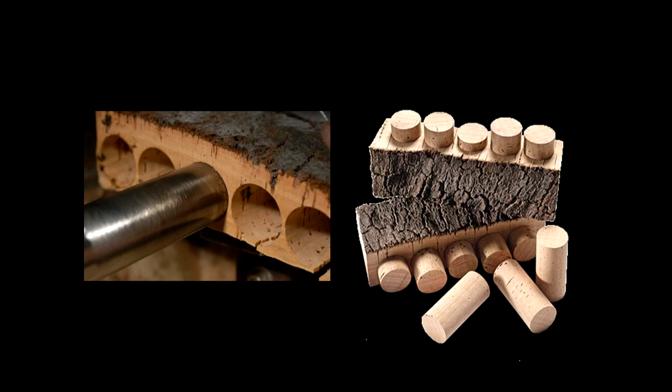And then the waste from the wine stopper industry and from the cork forestry in general is granulated. And then it's steam cooked using energy almost entirely from waste biomass from the forestry. And when it's cooked, the cork expands and it releases a natural resin inside the cork, which is called suberin. And it melts and then rebonds to form solid blocks of pure cork with no added ingredients whatsoever in the cork blocks.

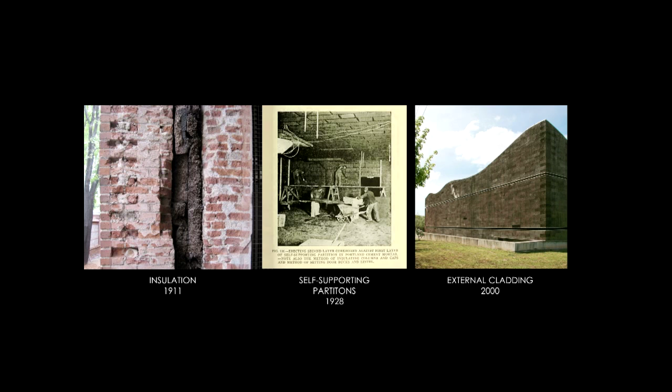And expanded cork has been used in the construction industry extensively for over 100 years, and recently as external cladding, first used about 20 years ago by Alvaro Siza and Souto de Moura.

Oops. So here we're going to describe the design approach. Stop it.

So contemporary buildings generally have to meet a range of performance requirements, and they do so typically by starting with structure, which is insulated, vapor control and breather membranes often introduced, external framing and cladding, and internal lining and finishes, which creates a very complex wall assembly.

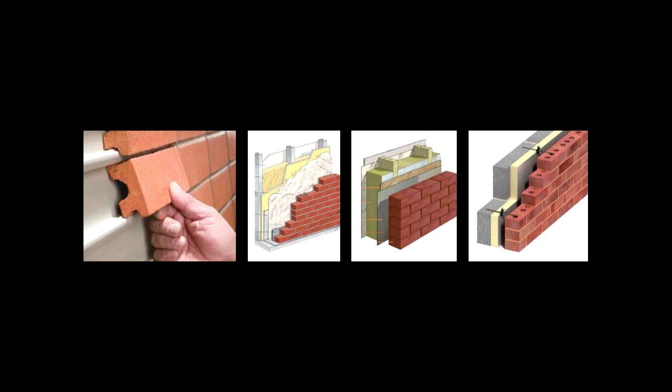For example, so-called brick houses these days are often, in fact, concrete or timber frame structure that only use brick really for the outer skin, which is combined with a whole range of other building components, materials, and products. And this, when they're all sort of bonded and glued and screwed together, creates complexity at every stage of the building's life cycle, and often ends with this, destructive demolition.

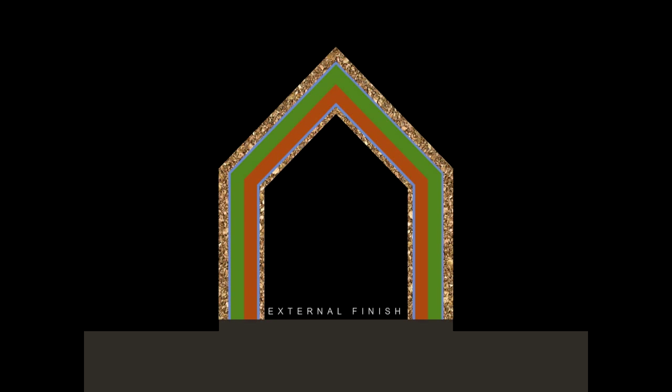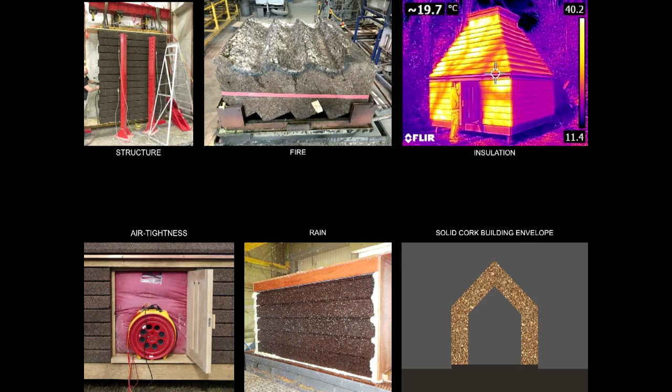And it's with this objective in mind that we undertook a 3-year funded research project with a team of industry and academic partners. And together, we researched and developed the solid cork building envelope using in-depth prototyping and a range of lab tests to, if you like, de-risk this new construction system for use in its first live project, the Cork House.

Okay, on to fabrication. So taking expanded cork billets, we developed a simple prefabricated construction kit that's assembled by hand on site. It's a little bit like a kind of giant plant-based Lego. The 1/2 metre thick cork blocks interlock using a tongue and groove fit with no glue or mortar.

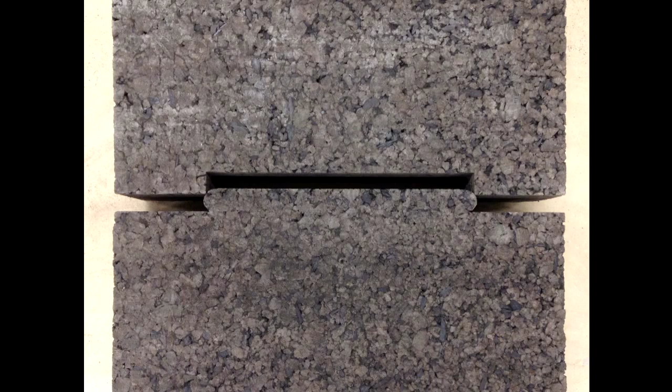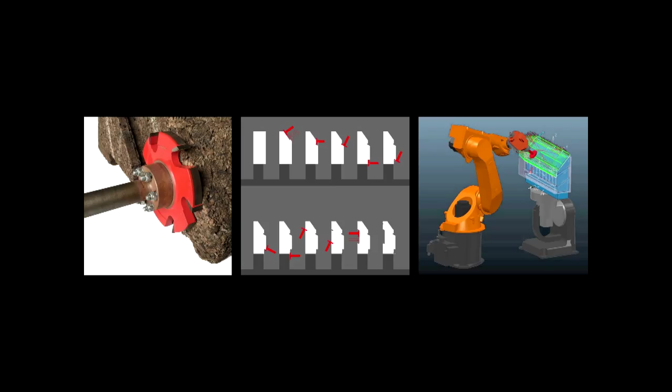As the research developed, it soon became clear that the system would require high precision machining in order to work, and so we moved from traditional fabrication methods to develop a digital fabrication process at the Bartlett. We developed the block designs in relation to the digital machine tools and developed the construction system as a whole, which then enabled us to proceed to build the house.

So regarding assembly, when it came to construction, we aimed to develop a simple assembly process to complement the material simplicity of the design. The aim was to use one system for walls and roofs assembled by hand without the need for any supporting falsework, and this led to the use of corbelled roofs.

We developed this idea through preliminary workshop assemblies, our first prototype in 2014, 1 to 5 constructional model, second prototype 2017. And on the basis of this research, we developed the cork construction kit, which is what we used for Cork House. That comprised of removable steel screw piles, solid timber floor, cork wall blocks in compression, timber eaves beam and structural wardrobes to deal with shear and lateral loading, cork roof blocks in compression, and roof lights on top, acting a bit like paperweights to give some weight to the top of the structure.

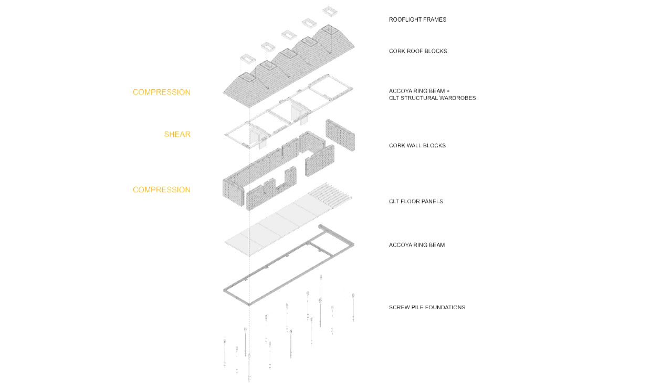The blocks were easy to assemble by a self-builder, who was Matthew, with an assistant. And each block weighs about 12 or 13 kilos, and it's a pretty clean and dry process. And here you can see the high precision nature of the interference fit joints with no glue or mortar used.

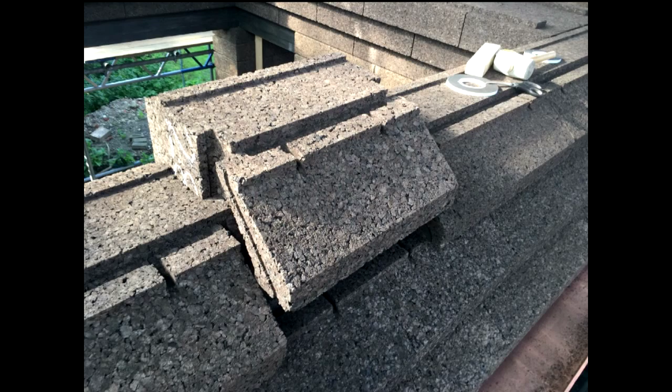So here we're going to describe the house as an architectural and sensory experience. The project is located on Tangier Island in the River Thames on the edge of Eton. The site was 2 gardens with a slightly awkward junction between them next to the riverbank. So the house was positioned in order to resolve this relationship and create an outdoor bay at one end, which creates a threshold between the 2 gardens, as well as an outdoor living area and an antechamber for the house itself.

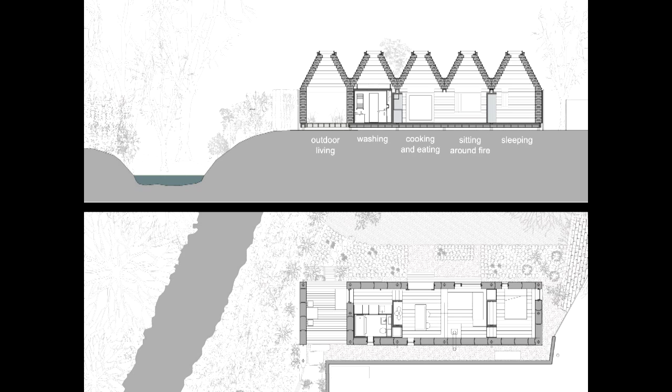And it's from this garden that you first get to see all 5 roof pyramids together. As a series of living spaces, each pyramid describes its own function, from the outdoor living pyramid next to the riverbank to the sleeping pyramid at the other end, and so on, the plan.

The first thing that everyone says when they first come into Cork House is they all comment on the lovely, woody, smoky aroma of the cooked cork. And this is just part of a very rich sensory experience you get when you first enter Cork House, with the atmospheric balance of light and shadow, and the acoustics very calm. And because the cork is pure structure, you get a really almost physical sensation of a load coming down around you, block by block.

In the bathroom, we created a slightly more playful space of illusion and reflection by way of contrast to the solidity and weight in the rest of the house.

Every building eventually gets to the point where it reaches the end of its useful life. And in order to avoid the kind of destructive demolition discussed earlier, the cork system can be taken apart as easily as it has been put together. We tested and demonstrated this with the cabin prototype that was made and assembled at UCL, and disassembled, transported to site, and reassembled.

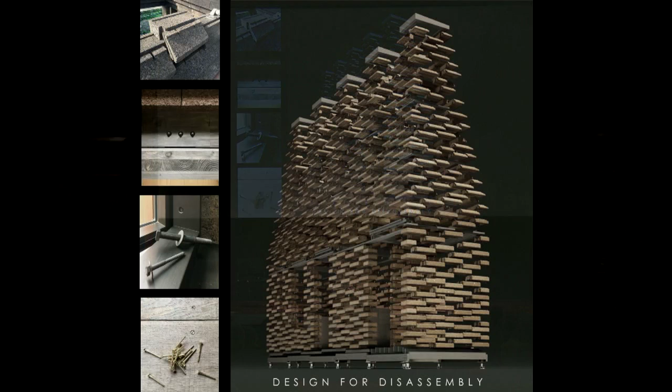The rest of the building is also designed for disassembly, allowing for recovery of components and materials at the end of the building's life. A whole life carbon assessment indicates the house was carbon negative at completion, which is because the amount of atmospheric carbon stored in its plant-based components exceeds emissions relating to construction.

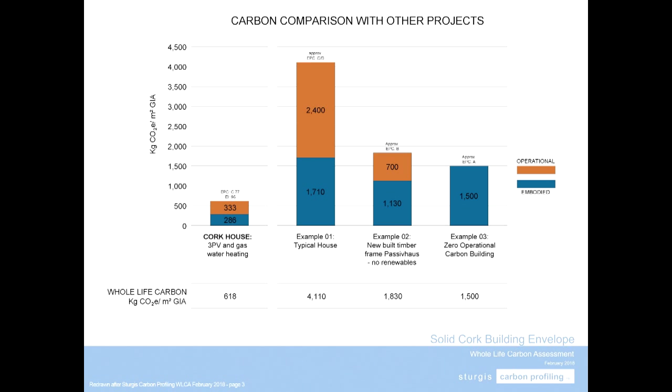This assessment indicates exceptionally low whole life embodied carbon in blue for the cork house, and also very low operational carbon in orange, partly because of the use of logs from site for heating and some photovoltaics. The result is the lowest whole life carbon for any building assessed by the consultant, considerably lower than that for the zero operational carbon building that they selected as a reference project, which is shown here.

So just to summarise and wrap up, the life cycle of the cork house starts with the material from a biodiverse landscape. It uses waste and byproduct from cork oak forestry. It's cooked with no additional ingredients, using heat from waste biomass. Assembled without any glue or mortar.

As a building, it has a specific form driven by its life cycle, and at the end of the building life, blocks can be disassembled for reuse, recycling into the manufacturing chain, or returned to the biosphere to biodegrade and fuel new life. That's the end.

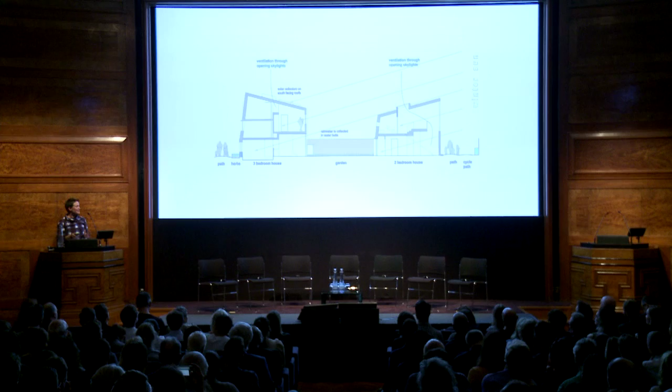And we got together with Buro Happold, and they suggested we did a passive solar scheme. So the basic idea is that you harness winter sun to heat the houses. So you have to be careful to model the buildings so that low-level winter light hits all the windows and face them all south, which in that particular instance required quite a convoluted arrangement where we had to stagger houses so they didn't overshadow each other. And having modelled this, all the houses on the winter solstice got full sun.

And I think the main thing about this project is we probably wouldn't have taken that idea much further had we not been allowed to learn from it. So Buro Happold did a really extensive post-occupancy analysis, which involved a year of measuring the building, sensors on every single window, and then half a year interviewing people to find out why there were discrepancies in energy use. I found it an incredibly interesting, detailed analysis, but the big picture thing we took away from it was learning what had and hadn't worked.

So, for example, some things hadn't worked as well as predicted, so electricity and water use weren't as good as they thought they were going to be. But actually, the fuel consumption was significantly better than it was on paper, and it made us think that passive solar design, given residents who have real problems with paying fuel bills and feeding themselves and paying their rent, was a really good way to go.

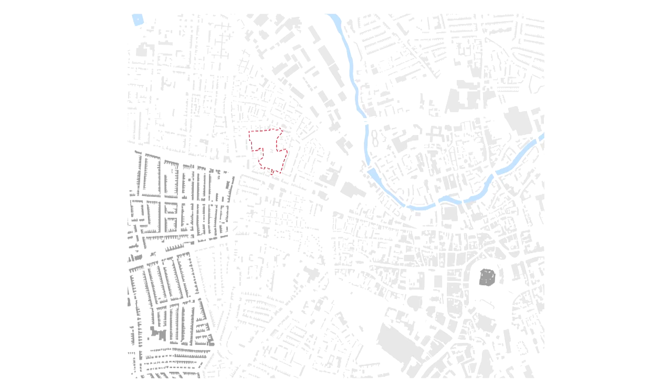But it's also very close to one of the most popular areas to live in Norwich, which is the Golden and the Silver Triangles. So when we were doing the competition, we looked quite closely at these really popular housing typologies and found out they were late Victorian streets and very tightly planned. They're 14 metres apart. This is not something you'd be able to do under current planning guidelines in Norwich because you need 21 metres overlooking distances.

But when we decided to try this out on the site, it unlocked the scheme. We were able to provide more houses than flats by keeping the roads at 14 metres. And a result of that was we were able to keep the buildings low, so we were able to make the passive solar scheme work.

So we had to then kind of argue about the overlooking distances, and the way we overcame that was to say, actually, we're going to face all the buildings the same way, so all the habitable rooms will face south. And actually the reality was that in the scheme, 75% of the habitable rooms ended up facing south, and so we'd solved the overlooking issues, except in a few instances where we actually worked with the planners to try and find ways that they were comfortable with this distance.

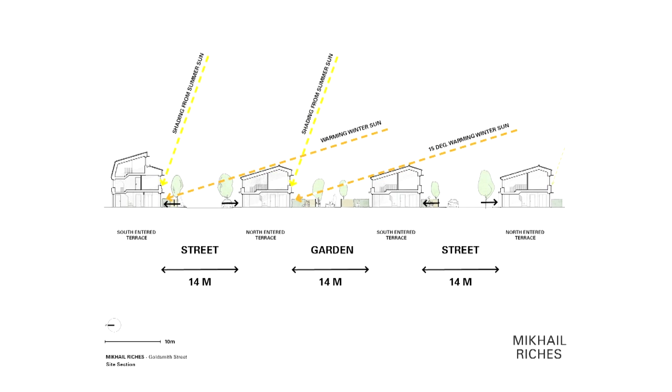And I think this really describes the passive solar principles of allowing winter sun to heat the homes, and shading to avoid overheating in summer. And then at some point along the process, Norwich City Council said, oh, do you think we could do passive house? And we were kind of, oh, why not? But actually, I don't think we quite realised it wasn't quite that simple.

But anyway, I think the passive house principles are similar in that they're fabric first. The walls got thicker. They're over 600 mil thick. And obviously air tightness is a massive issue, so controlling that on site is very difficult. And obviously you have MVHR to ventilate the homes. But it's now, I think, one of the largest passive house certified schemes in the UK.

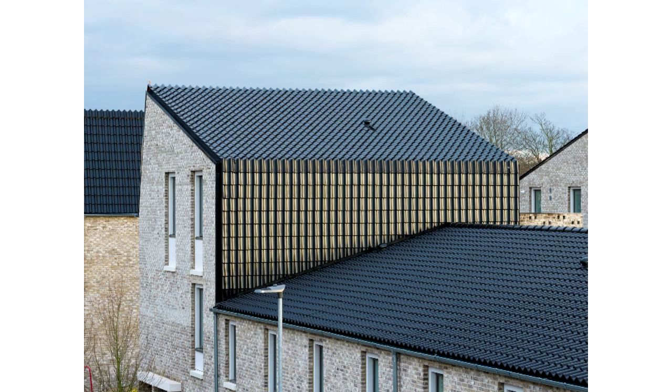And passive house modelling means everything has to be really carefully considered, where the windows in the walls are, how you detail them, the shadowing, all that is part of really a kind of computer model. And the materials were chosen partly for their cost. This is £185 a square foot, so it's a really low budget scheme.

And obviously robustness and maintenance is a big issue for local authorities, but they're all materials you see around Norwich. So Norwich had really close trading with Holland, and you see lots of these kind of materials, glossy black pantiles, and the white gault bricks are seen across East Anglia.

And one of the really important things for us was to design a scheme that was very child-friendly, that every single house could access a play area without crossing a road. So there are various different scales of landscape play areas within the scheme, but one of the brave things Norwich did was allow us to put in a kind of ginnel or alleyway at the back of everyone's back gardens for small children to go and play out safely.

So there are these private communal areas that are just for the residents. Which was a kind of risk for them, I think, because it's the kind of unmanaged place that local authorities don't really want to take on board, and we never managed to persuade anyone else to do it.

But there are these, actually this was during construction, it's now all green, but there are these bigger play areas dotted around the scheme and at the edge to connect it to the other housing schemes near it. And this is the ginnel, and actually, the feedback has been it's an incredible generator for people to make a community. Kids are all friends, their parents are friends. They have water fights and barbecues together.

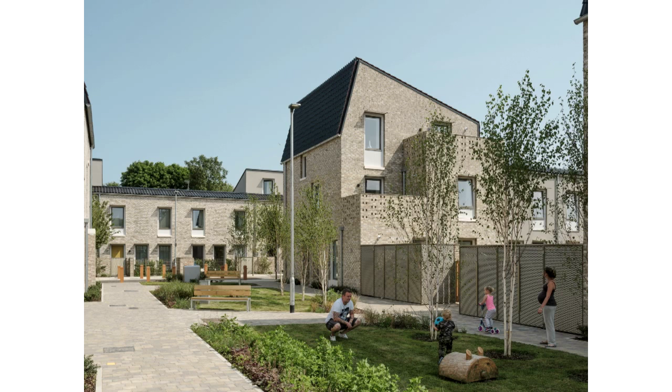And then those ginnels lead on to these other play areas that are all car-free. So the kids just scoot all around it without having to cross a road. I think these might be plans.

The way that we've managed to get all the houses facing the same way is to have large kitchen dining rooms facing south and also bedrooms above it with a living room facing north. And at the top of the stairs are these extra wide living rooms. We had to redesign this because of the bedroom tax, so the size of the houses came down, so we made sure that there was a place for people to be able to stay who came to visit.

And there are generally two-bedroom houses, and there's an extra wide house, which is a four-bedroom house, which has a room in the attic as well. And so that's a south-facing elevation. It has more glazing and shading, and then the north-facing elevation has smaller windows, and for the living rooms, Norwich provided shutters for them to have some privacy because they give directly onto the street. In the flats at the end, everyone has a front door and a private outdoor space.

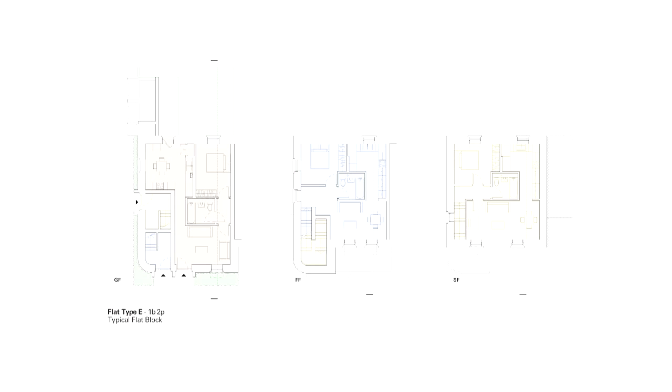So there are no common parts in the scheme, which is, again, something that is hard for local authorities to manage and becomes problematic. And the way that we've achieved that is to have a scissor stair, so everyone has their own front door onto the street. You either enter into the ground floor flat, or you enter into a kind of large lobby and go up into your own flat, or around the side there's two stories to go up to your own flat. And everyone has south-facing amenity space.

And that's it. I've got a minute and a half. I think reflections that actually since we were shortlisted, we've been slightly overwhelmed by the amount of interest. Lots of, particularly local authorities, have come to see the scheme and try and find out. And Norwich have been great at talking to people about how they've achieved it, and particularly how they raised the bar on the environmental aspiration and why they did that.

That was all born of a massive amount of research as to how reducing fuel poverty actually means that people aren't in arrears on their rent, and so people don't default. And I think the message is getting across to lots of people, which is brilliant. I think one of the problems with this is it's subject to right to buy. These houses are subject to right to buy, and I think that's a major stumbling block for local authorities to be doing this kind of thing and investing in their housing stock.

So it's particularly disappointing with the announcement this week that not only is it going to be local authorities who are subject to right to buy, but also housing associations. And hopefully that will change one day, and then we'll see a grand era of council housing happening again. Thank you.

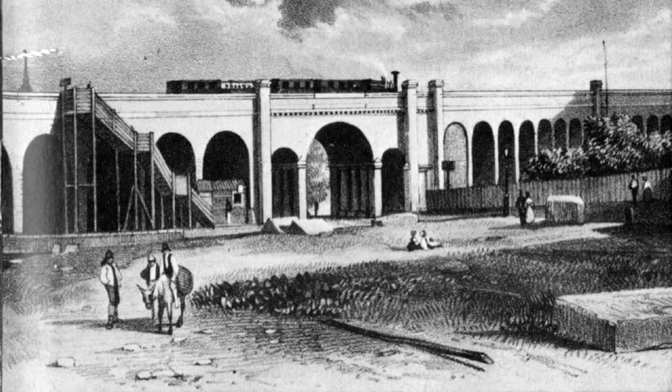The viaduct was built parallel to the river, about 21 foot above the ground to get out of the floodplain, but also to allow the free passage of cattle to graze along the verdant banks of the Thames, which I know would be quite difficult for people to believe, but that's why they did it. There's going to be a series of diagrams now showing the historical development of the station.

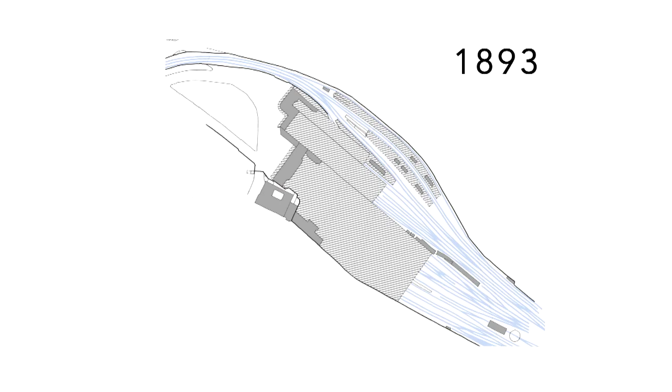Now, the reason for that is really two things. One is there's no Grand Plan, there's no Cubitt, there's no Brunel, there's no Gilbert Scott here. It just grows as it needs to grow, but also as it grows, there are issues of severance. As you see it grow, there are different companies involved. One side of Southwark becomes very separated from the other, not only in plan, but it also becomes disengaged with the street level. So when you get to 1907, it's more or less as it is today, and then 2009 is when the changes started.

So this is what we were left with. A lot of people here won't remember this, but this is a very divided station. It has through tracks on one side and terminating on the other, and a 70s concourse in the centre. Now, really, this is very muddled, and I think Sir John Betjeman, the poet laureate and rail enthusiast, described this as the most complicated and muddled of all London termini. This is a transformative project.

There's a little bit of video reminding people of how crap it was before we arrived. Here's the way across the thing. Here's the main entrance. Nice if you like brown. Here's the very long concourse with the noddy roof. The platforms are unprotected. You've then got all the waiting spaces more or less on the platforms. You've got the footbridge. This was your waiting space where you had to get information. And here it is, relative to the Shard. What was the catalyst?

London Bridge was at the heart of the Thameslink programme, which is really the north-south version of Crossrail, linking Peterborough with the south of Brighton and Kent, and really doubling the number of passengers through the centre of London.

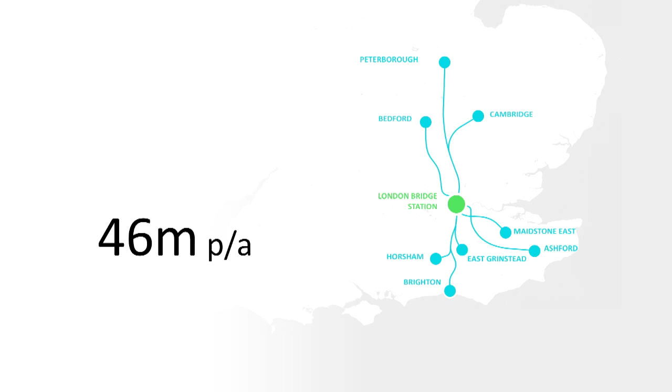So for London Bridge, that means going from having 46 million passengers a year to being designed for 96 million passengers a year, and actually it's probably closer to 120 in the future as we move to a metro service.

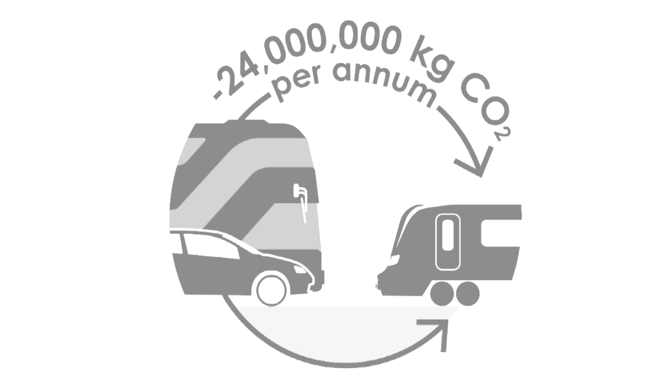What that means is not only financial benefits, but the transport transposition, moving from carbon-critical modes of transport like buses and cars through to trains, saves about 24 million kilograms of CO2 a year. That's just for the London Bridge portion, which is the equivalent of running about 10 Shards for the year.

How do we do that in rail terms? Well, we've set up the viaduct so that we just have to switch the tracks over. We've got 9 through tracks and 6 terminating, because you get twice as many trains through a through track than you do a terminating track.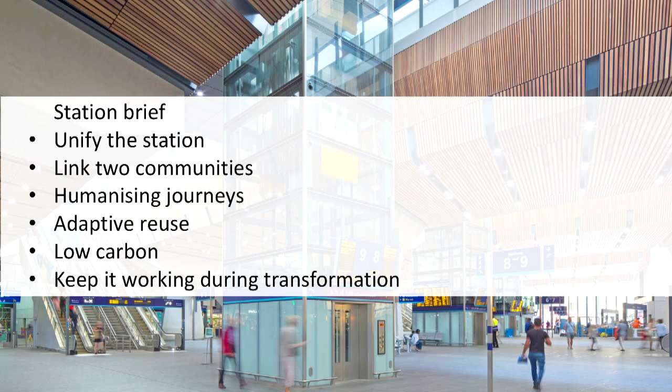What that means for the station is a few things. We've got to unify the station for the first time and make a really nice space. We've got to link the two communities, which have been severed since 1836. We've got to humanise those journeys, make it a legible, civic space that's enjoyable to use. It's an adaptive reuse project - we should only really build where we need it. We've got to adopt low-carbon strategies throughout, but also do all of that on the site of the existing station and keep it running while we're doing it.

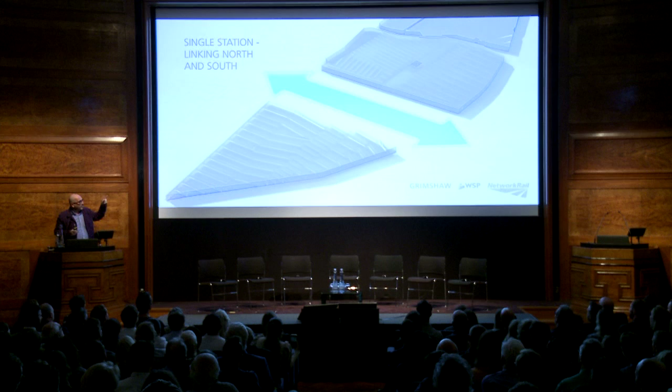So anyway, what we do - this video shows the concept. We get rid of the old station because the new tracks don't allow that to stay. The existing labyrinth is cut, a 75 metre wide by 185 metre cut. We need to link - at the bottom of the page is the LUL for those people who use it - we need to link through.

So what we do is make the existing arches wider and longer to connect the two concourses. We've got a concourse, the LUL at the top, and this new concourse here. Stainer Street, which is an old street, we've then pedestrianised. We've tried to make it as column-free as possible and put all of the station down at the level below, so all of the retail and all the information is down there, flipping the operational concept so that we don't have any waiting at the platforms, because the trains are there every 90 seconds.

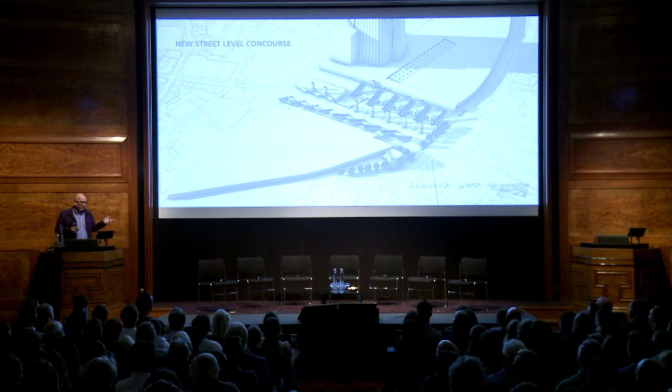What that means for the plan - this is the existing plan. You'll see here the two links, Weston Street, which doesn't exist anymore, and Stainer Street. The dark grey is storage that really wasn't used, and the salmon areas are the bits that are public. So there's not very much active frontage down either street, pretty impenetrable.

So we go to what we've got now, which is this large street-level concourse, an internal street through between LUL and the concourse, which is called the Western Arcade. All the blue is station operations, and all of the salmon here is retail units, so it's all much more active frontage. This is really an adaptive reuse project - 52% of the whole project is reusing existing arches, so it's very sustainable in that regard.

Next layer is putting the tracks on, bang. Each of these tracks are on bridges, and the bridges hold 2 tracks and 2 platforms with a void in between. The plans are like this: at the top of the page you've got the terminating tracks with the Shard concourse and a triangular space that links it. Then, on the other side, about 2 metres higher, you've got the through tracks with the voids in the centre.

So you'll see here, there's a larger space with the terminating tracks linked to Shard, and this is the smaller stuff on the other side.

Next is the roof, conceived as ribbons, for two reasons. One is the main space below, kind of like New York's Grand Central, in that it's an internal space, so really we don't want a big overall roof here. But also the building was made in strips, so we wanted to make a strip, finish it, move to the next one, and keep doing that without going back and disrupting passengers two or three times.

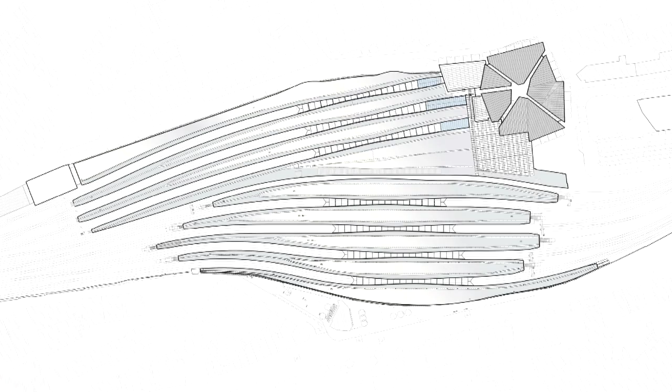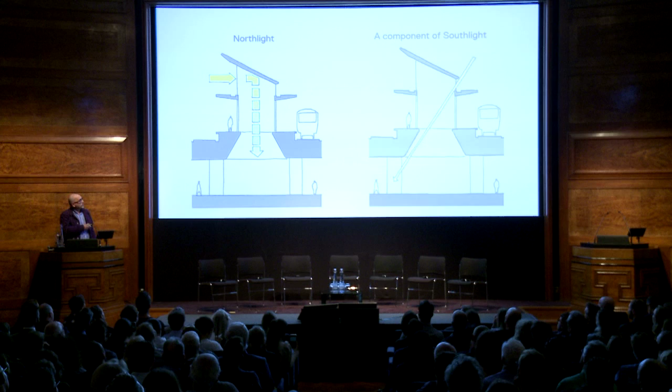But we did want these ribbons to appear like one roof, so we actually broadened the ribbons in the centre, creating this larger space. By doing that we're able to lift it to get north light, but also tilt it and lift it to get a component of south light into the station.

You put all these components together, you've got the bridge, platforms, and all of the eyebrow and all the stuff in there. So what you then get is this city room, effectively, for Southwark, which is civic in scale, has got views out, is legible, and is bathed in light.

We've then clad the bridges in timber, which I think gives it a feeling of handcraft quality and a kind of humanising element to it. We'll very quickly go through the public realm.

So this is the old plan. You can see there's not very much public realm. Here's the change: it's now become a kind of covered street, effectively.

I'll go through some of the entrances. So 60% of the people go from LUL to the concourse, down this Western Arcade, conceived as there are existing — this is the oldest part of the station, built in 1836, with quadripartite brick arches. We've kept the memory of that and negotiated with those layers by using board-marked concrete. But it's also lined with shops, and these shops are not shops for stations, but shops for the local people and the working community.

In Tooley Street, there's an access down to the GLA and Tower Bridge, but this is more of a civic thing. It's keeping the line of the viaduct but an open colonnade, and it really opens out to the street and creates a more civic gesture, which at night really shows the station engaging with the street.

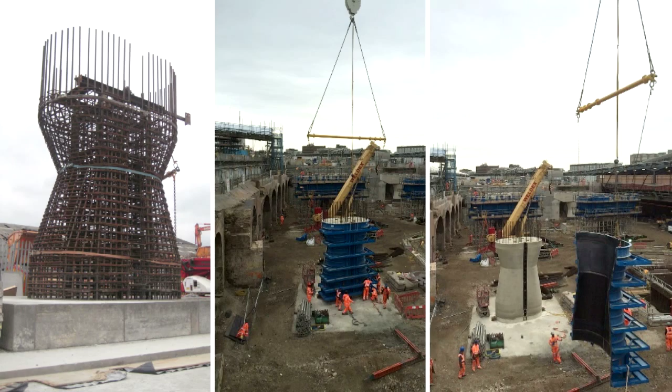And what you also get is some really nice pieces of innovation in terms of this. These are the columns, which are a big part of the character. We used off-site construction, and here's a time lapse showing us building it — this is six years in about 35 seconds.

We were located in this building here. They started demolition on our planning drawings, and you'll see elements of the station being built and then immediately used, as we're going underneath, demolishing existing bricks and going on.

So I think we'll just hang on with this for a second. You'll see this major part here just gets demolished over a weekend. They then start to put in all of the columns — hang on one second — and then you'll see the bridges come in, and the modular construction of the canopies happens really fast. That enabled us to build cheaper, quicker, safer, and with better quality.

So here we go, there we go. Boom, boom, boom. Blink and you'll miss it.

Just so we know, I think the carbon in construction is important: 10,500 tonnes. 98% of construction waste was recycled on site, including all the bricks which are in the foundations and on top of the arches. We took all the backfill on the rail, washed it and reused it. We also took a lot of the soil away by barge, taking trucks off there.

But also we got the highest ever — CEEQUAL, which is the BREEAM equivalent for infrastructure projects — we received the highest ever rating.

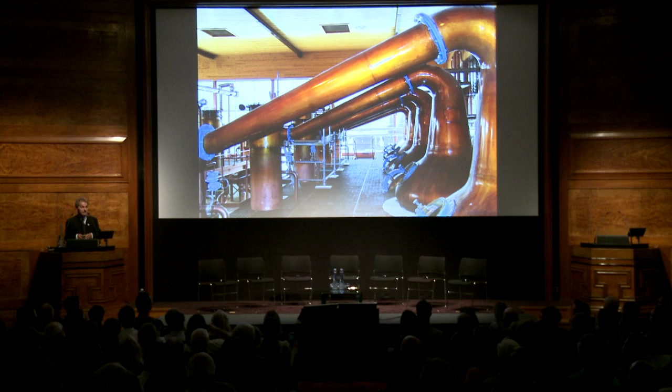Our understanding of whisky was fairly limited. These are the still sets of their original facility. Considering they've built an international brand, they've done incredibly well, and they did appear on a Scottish £5 note for a number of years.

In essence, we were asked to produce ideas which essentially we chose to maybe sink the building into the hill and to create a series of still houses that reflected the brief, which was to have 5 million litre sections that could be phased, which is where the unusual arrangement has occurred. They also wanted to create a very strong relationship with that first image, Easter Elchies House, which is the brand logo and appears on all bottles. The site itself is 8 metres higher than Easter Elchies House, so our decision to bury it and to actually then use the visitor experience as a means of being able to traverse up through to the main production levels.

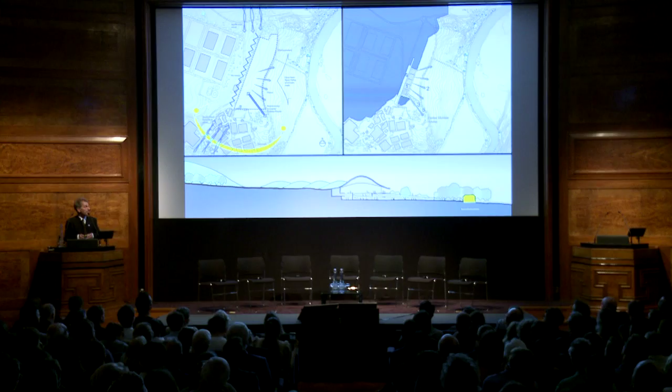You can see the diagram here. The biggest risk we took on the competition is we made all of it one experience. They talked a great deal about integrity and craftsmanship. Our view was, rather than seeing a virtual representation of how whisky is made in an exhibition area, we would actually make the whole thing immersive.

Which has actually given us our own complexities, because in a sense, a distillery is not governed by building regulations, it's a petrochemical plant. And if you ever see a still fire, it's a river of flame.

So we created this cut within the ground. You can see the individual still sets, which might be familiar. The green area was the tank farm, and we buried the whole tank farm. We reduced all of the proportion of vessels. We thought it was odd to bury a building into the ground and then have a whole series of stainless steel tanks blotting the hillside. We put a service road that ran below ground, and the visitor centre became essentially the main part of the distillery itself.

As you see the diagram on the right, we had no clues as to how whiskey was made. We'd done a winery, there's a completely different process. So that's us beginning to understand what part of the process of whiskey making the building represented, which wasn't all of it.

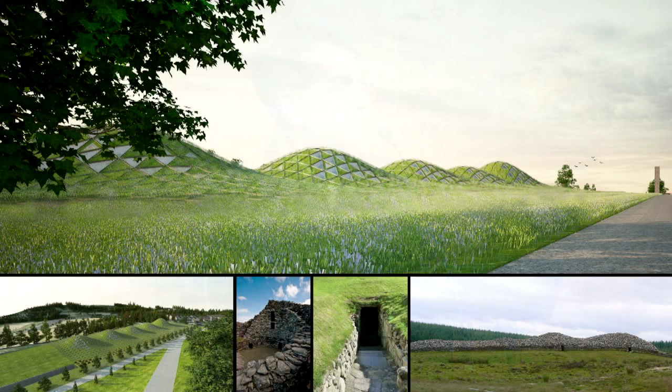We were asked to look at Scottishness, but they did say no bagpipes and kilts. And that was those words. So how far in history does one go back? Our view was to maybe, if you look on the bottom right, the image of a long cairn, burial mounds, which were obviously man-made landscapes, the steep cut into a well in Moray, which is where the district is, where the distillery is founded, and Scottish brochs, these circular little houses of twin walls, which were present in all of the landscape, and created this mounded series of structures that responded to each of the still houses.

So the basic components is a steel frame over a series of circular arrangements where the actual stills are supported by all of the plethora of equipment below. So you can begin to see the actual building itself is only the visitor centre and that little control room at the back. The rest of it is an essentially unheated space because it's actually dealing with manufacturing process, which has its own demands on energy. That's an aerial view. This is a 22,000 metre building. It's significant.

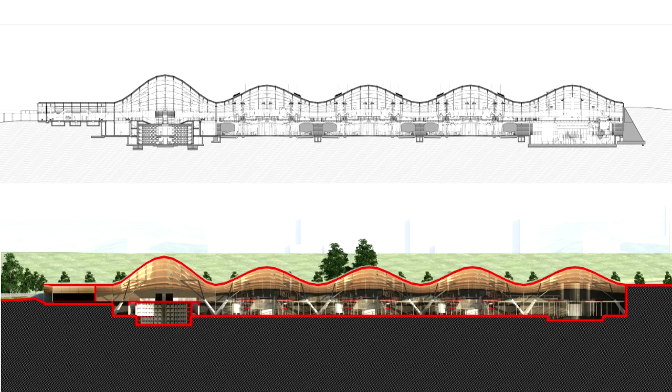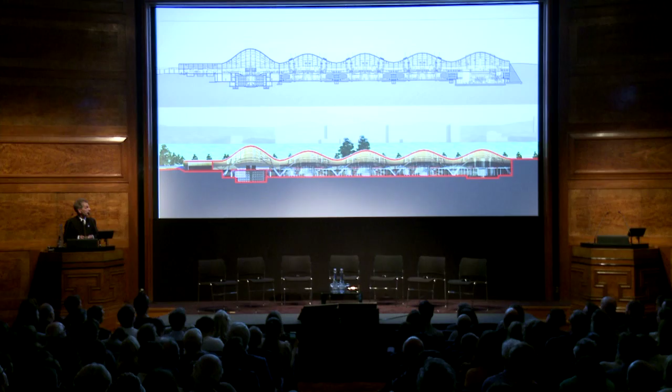These are drawings of process and how we arranged all the various hierarchies of the tanks to create an almost classical and theatrical display of the equipment. We wanted it to be the most beautiful, well-coordinated distillery on earth. You can see the cave privée, the sunken area. I'll just quickly go through. And the coordination our team did with all the manufacturers to create a prefabricated entity that could be replicated. And there are plans for a further two more. And you can see its relationship to the hillside.

The cave privée that forms the termination of the process. The view here, as you see it from the air. You can see what's being built behind. Those are maturation tanks. That means essentially none of the spirit from this building will be for sale for at least 10 years. You also see a biomass plant which supplies 90% of the energy, which was built simultaneously, which is used by the Forestry Commission.

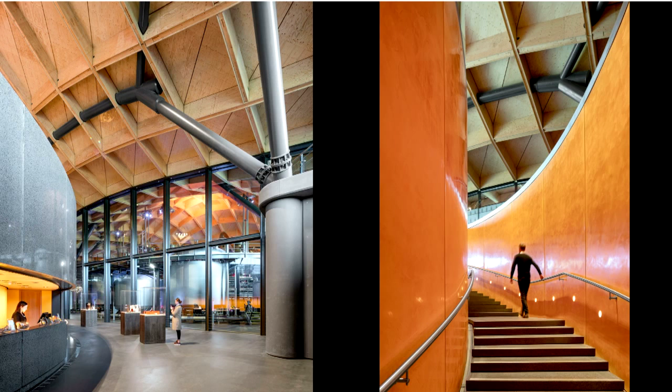As we move down, compression and release. It was supposed to be a mystery revealed. You suddenly come into this slightly cathedral-like space. The glass wall there is a symbol of our naivety, realizing that there are reasons why these buildings are placed 20 meters apart. One is occupied, the other one is a petrochemical plant. So this has been a tested wall to be able to allow people to experience the full layering and strategic layering of the process itself. And then the ascent up to basically the main tour and visitor area. This is all public over these parts.

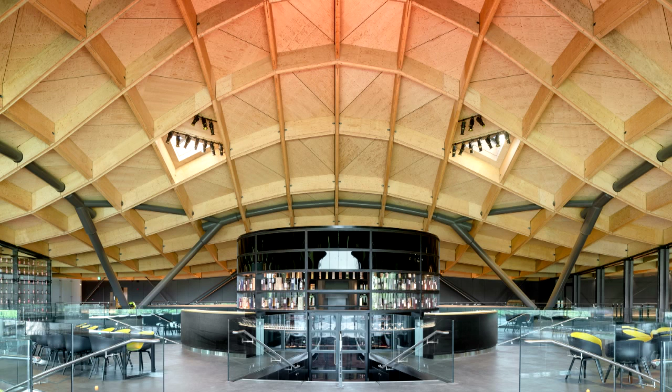You see the grid shell roof, not one curve in it, which is prefabricated, made out of ply and boxed, and steel supports that basically mark the point where the structure goes from compression into tension. This is then looking down. You see the aperture in the floor there. That opens up into the cave privée, which is a little bit of theatre, which is basically to allow people to see barrels sleeping. As one begins to move through the dynamics of how you move through the space, one has to really be there to appreciate it.

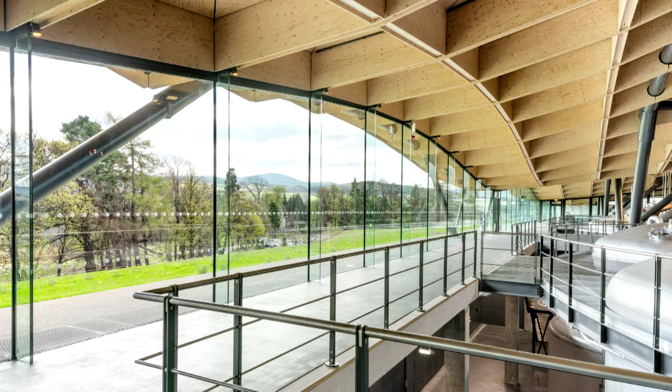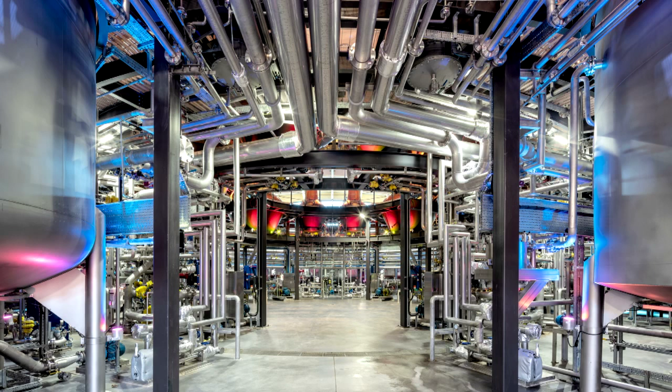All this glazing, it doesn't form part of the thermal envelope. It's just a shelter. It's really looking out towards the beautiful Spey Valley, in contrast to the equipment. As we move through, this almost classical structuring of the still sets themselves, elevated. The process of a ship's engine room. The chap in our office helped to assist all of this. I'm nearly done. A hole which is simply for still removal. You begin to see how it sits. You can see the big service road that sits below that.

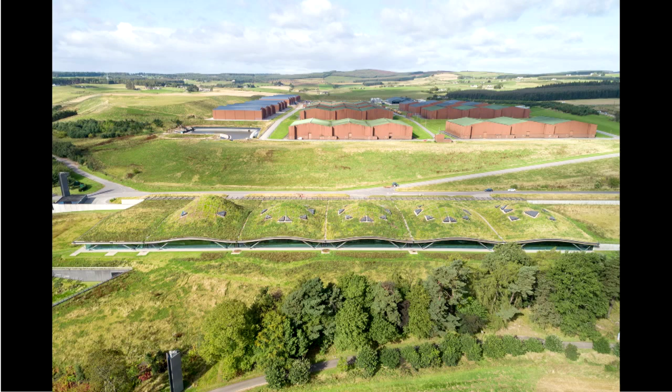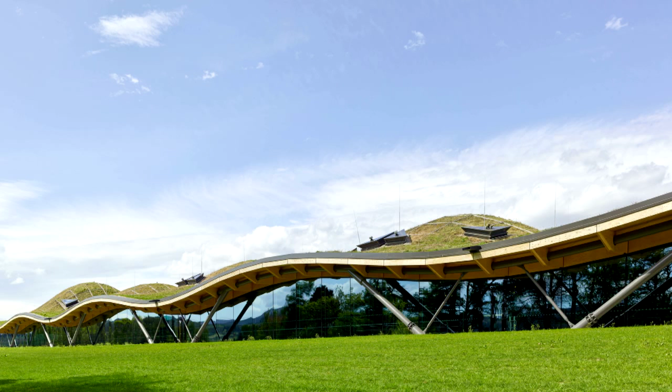And looking across this long eyebrow, we couldn't really replicate what was already there, because you can see what is already there is behind us. So we decided to make a landform, which I think to some extent is interesting in terms of how one approaches process buildings. Process buildings occupy a great deal of land area around cities. They're naturally ignored buildings, but they still form part of how we appreciate the world. And I think like any building, it should be treated with the same care and respect as anything that one would see as forming part of major cities.

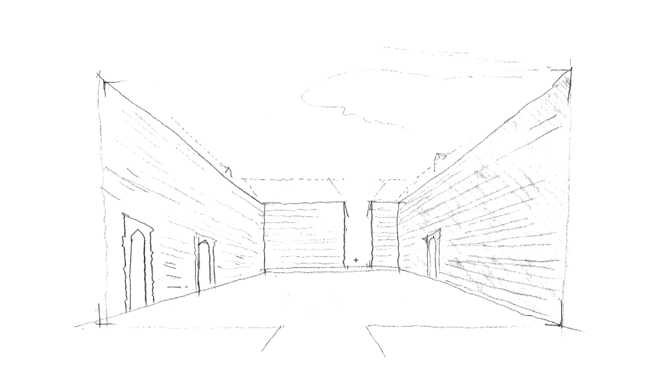We thought through our interventions as you'd experience them and as we'd build them, so in perspective and in sequence. To dig down for the stall seating and for the orchestra pit, we kept it away from the walls, which avoided costly underpinning, but also maintained the ground at the base of the walls so that their weight and substance weren't undermined. We placed a roof over the courtyard as high as possible while staying beneath the ridge of the existing roof, building up the volume with an independent carpentry roof structure.

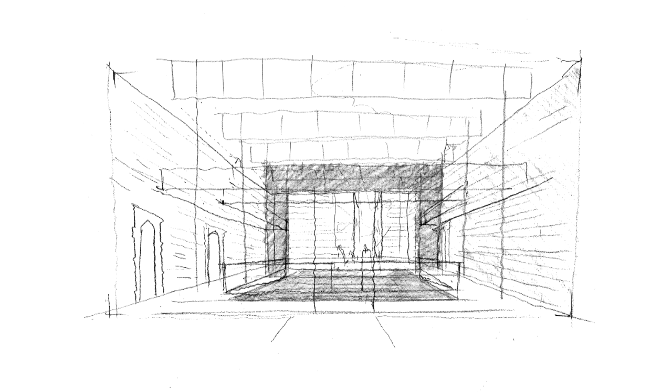We inserted a balcony on 3 sides to help us get the capacity, but also to support the reflection of voices and bring performers and audience close together. Masking the stage, but keeping the walls visible there too, together the balcony and proscenium make the space of the theatre, a room within the stone room. To retain a memory of the old stable yard and give the theatre a slightly external feel, we cut a large rectangular roof light, more or less centrally.

When you intervene in an existing building, you have to make clear choices about where you make contact and where you remain separate, where the new should echo the old and where it's distinct and different. We chose to connect the new roof to the old walls on a single line at the old eaves. By sitting the new roof on the existing walls, we used their structural capacity and minimised the new structure within the theatre. But this gave us a tricky moment where the 2 roof structures intersect.

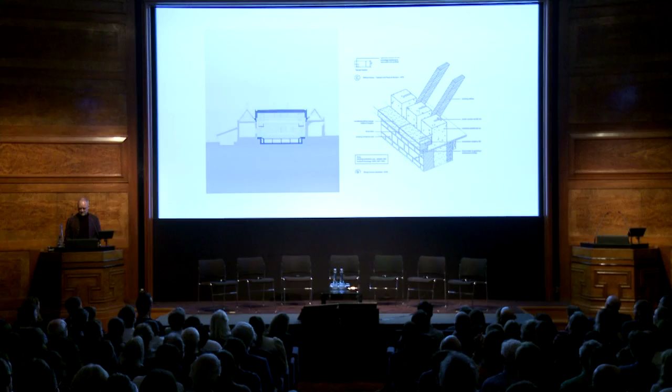And with David Derby of Price & Myers, we developed a detail to thread new precast concrete padstones in between existing rafters. The padstones then support a ring beam and roof beams in steel. At the top of the stone wall, it is levelled with tiles and lime, and an ironstone string course makes a top to the wall, where the old gutter used to be. The new steel structure bears on the stone walls through these padstones, set back a little to hide irregularities in the line of the rough stonework.

Pulling the new roof away from the old one conserved the inner face of the Collyweston slate roof of the old stable block, which allowed Max Fordham to develop an ingenious and economical ventilation strategy with a mechanical supply. A temporary plant is hired in for the festival to supply cooled air through the floor and natural extract through acoustically attenuated air paths in the thickness of the roof.

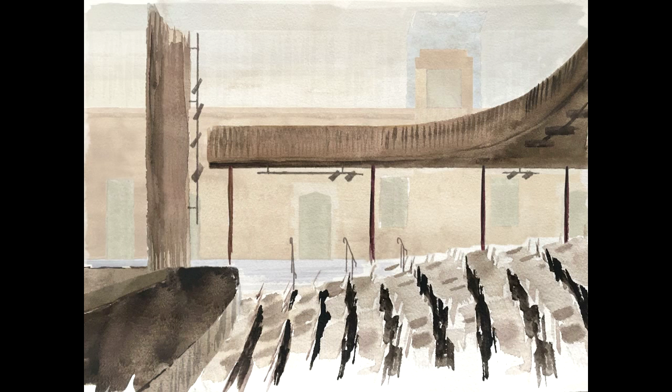This logic of contact and separation is carried on in the interior. For the balcony and the proscenium, we planed the wood and stained it dark, keeping these elements in the background of the audience's vision, and distancing them from the lighter outer walls in stone and wood. We minimized some of the distinctions between old and new, treating this as a secondary issue to the distinction of the theatrical centre and the outer stone room.

We played harmonies of texture and colour. We grit blasted the wood boards of the roof above the stone walls, giving them a texture which echoes the rough ironstone. For the new floor at the base of the old walls, we precast concrete against rough timber boards, similar to those used for the roof. So stone and wood and concrete have unexpected correspondences, and they read together as a harmonious whole.

We kept the balcony off the stone walls with a clear gap on all 3 sides, and shaped its edges to respond to the doorways and the large arched entrance. We raised the balcony higher than you normally would to avoid it cutting across windows. We even kept the proscenium off the walls. The hinged wood proscenium panels allowed the relation to the stage to be shaped and tuned.

So there are hundreds of small judgments about geometry and detail and material and finish. And these judgments are partly about fitting the theatre softly to the host structure, about not doing violence to the heritage. But they're also judgments made through a continuous dialogue with Bob and Anne and their team about how to make a theatre which reinforces the intensity of the encounter between public and performers. The material presence and the sense of time are crucial to this intensity.

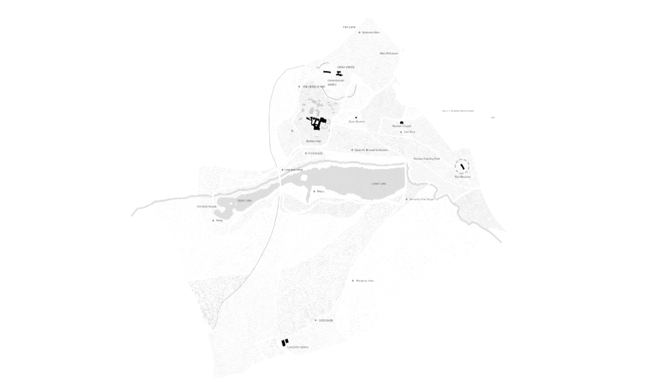Now, the project and the brief that we were set was to create a new visitor centre at the east of the park here. The current facilities, the current visitor centre is to the north. There's other gallery spaces to the south, but there was this huge swathe of the park that was completely underused and underactivated.

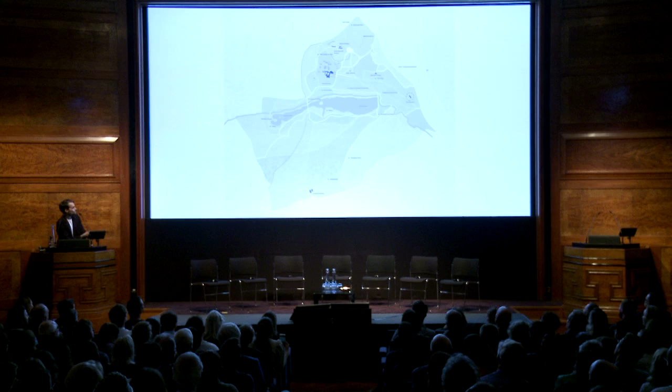So when we won the competition, we were firstly quite surprised because we'd only been qualified for about a year, and the client had entrusted us with this wonderful commission. It was our first public building as well. So we spent quite a lot of time actually sat in this space just pondering the relationship between sculpture and architecture. To make a building in a sculpture park is quite a particular thing. Do you emulate a work of sculpture, or do you make a building that houses sculpture and recedes back into the landscape?

And we were particularly taken by the way that James Turrell intervened in the old deer lodge here and formed the sky space. Here he was playing very much with perception itself, as opposed to many of the more modernist sculptures, which are objects perceived in the round. And later works by Andy Goldsworthy, which have a real place specificity, we were very intrigued by, as to David Nash's 71 Steps, which are in a way enveloped and folded into the site itself. So these were all themes that were present as we were trying to wrestle with how do you make a building in a place like this, in an 18th century parkland.

So the site itself was actually this great big depression. It was a former quarry where they'd mined millstone grit, which was a local sandstone used to build the dam further down the valley and many of the other buildings on the estate. The site was also very much the hard edge, the boundary line to the park. And the brief for the building was to make this new, inviting, welcoming entrance to the park.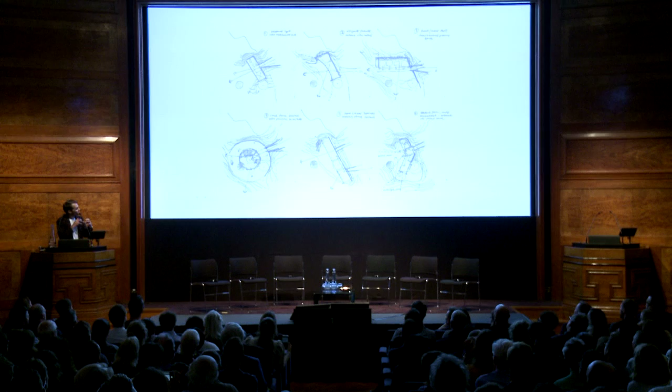So as we began to wrestle and toy with how to fold this brief into the site, we began sketching in a very topographic way. How do you begin to work with the landscape, just as land artists had done in the 60s and 70s. So here, Michael Heizer, in his work Double Negative, was very interested in the ability of moving outside the gallery and working with the sheer mass of whole landscapes to create works of solid and void, works which really play on your sensory perception.

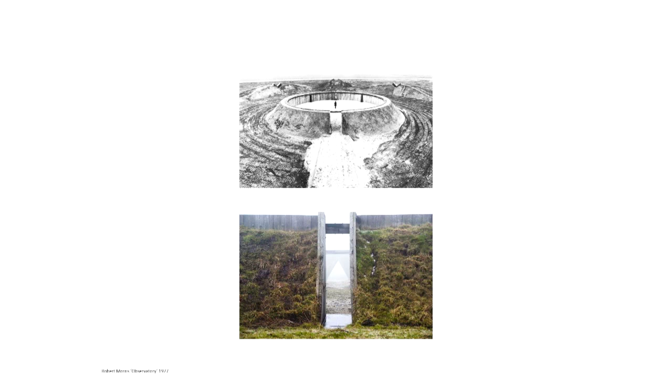So we were very interested in this era of land art and earth art and working with the topography and the landscape to fold our building into the site, using techniques such as mounding the earth around the building, retaining structures to create this boundary treatment to the building with a single opening which would invite you through into the park.

So the resulting plan actually lies on a north-south axis. You've got the M1 over here, Huddersfield Road. So it really creates this strong buffer to the east with a singular, quite enigmatic entrance into the building, and then this slightly sculpted, curved elevation.

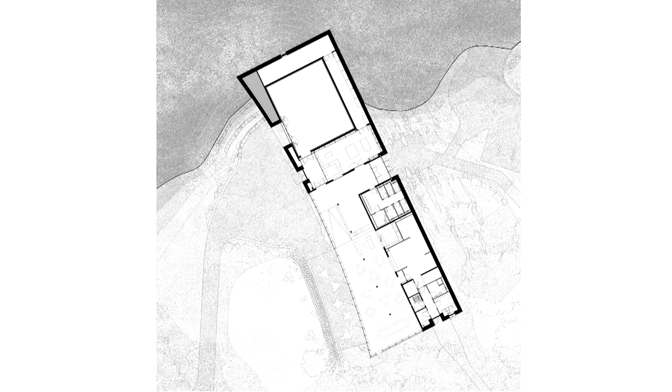The gallery, a relatively small space, but important for the kind of qualities of its environmental conditions. So we situated that to the north of the site, buried into the hillside, and the land actually then slopes away to the south. And the southern edge of the building is very much more a pavilion sat proud on the land, a much more lightweight structure.

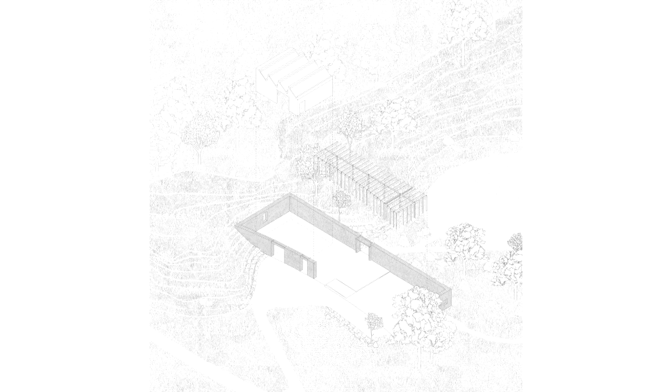Here was an early concept image for how we wanted to forge that entrance, really drawing from the local geology of the site and the history of the site as a former quarry. So you see the walls around the perimeter of the building retaining but create that strong boundary treatment. We did a lot of research into the local geology of the site and quarries that were still open, and we were able to source all sorts of aggregates for this wall that we intended to be almost like a sedimentary rock in itself, heavily layered and extruded up from the land itself.

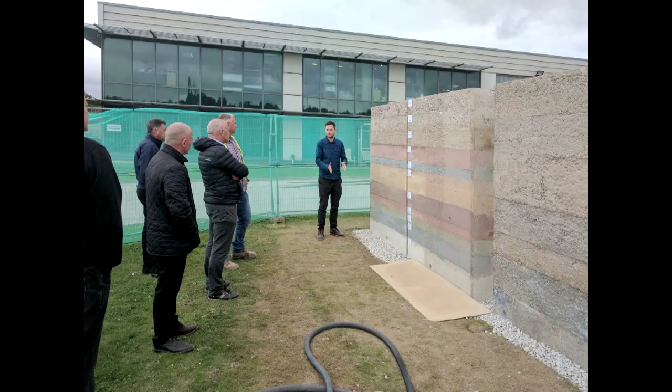This was one of the worst trials, very stripy. We went through many, many iterations and many variables of both aggregate size, pigment, the degree of water jet washing and exposing of the aggregates. But in a way, we wanted the building to feel as if it had always been there and feel pre-weathered. So there was a lot of testing and experimentation that went on. And also to try and make it as lean a mix as possible and to reduce the cement content as much as possible. So the mix here comes close to a rammed earth mix, albeit it has some cement in it to make it a bound mix.

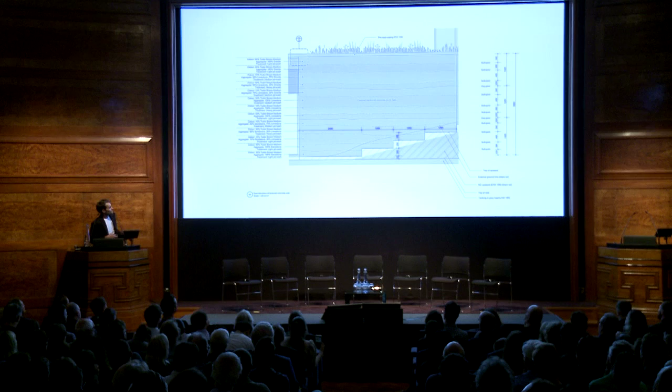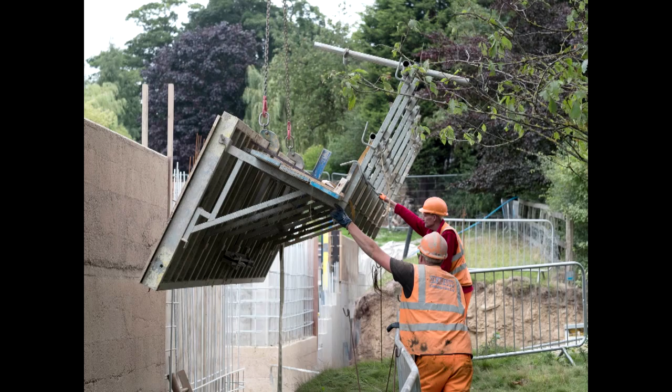This developed into some more detailed specifications, and although the wall feels quite naturalistic and random, there was a lot of control involved in making sure that the end result was as desired. So all of the concrete was mixed and batched on site in small batches, poured in 400 to 600 millimeter lifts, struck, and then the surface was gently water jet washed to reveal this patina in the aggregates of sandstone and limestone and granite. And I think this image in particular shows the relevance to the stone that we were pulling out of the ground and which now adorns the perimeter of the building, and the qualities of the tones and colours in the elevation there.

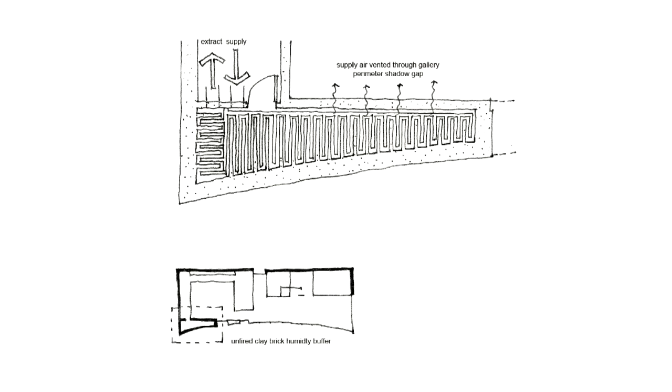One of the more invisible aspects of the building is this passive humidity buffer, and it's not on show in the building. It quietly operates in the background, but it's made up of 10,000 unfired clay bricks. And what it does is it moderates the humidity of the building. Clay is a hygroscopic material, so it draws in moisture when it's very humid and gives it out when it's very dry. So the building uses this to pass air through, and then it passes it into the gallery through shadow gaps at the top and bottom of the gallery walls. And this is intended to achieve about 50% saving on the energy use for the air handling of the building. And to our knowledge, it's one of the only passive humidity buffers used in an art gallery.

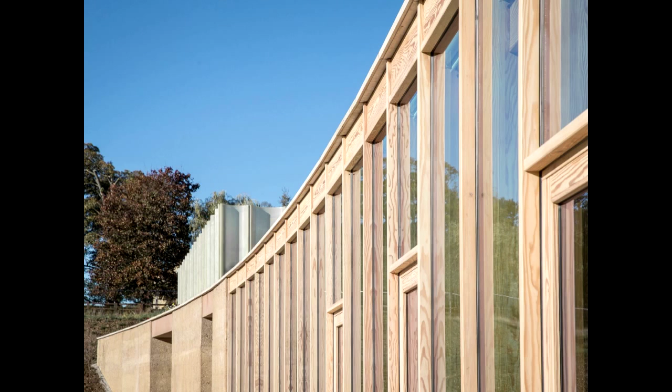So the resulting building and the remaining material palette is very much resonant with the existing geology of the site and the tones of those walls. And then the gallery roof itself has this light box which pops up and is a kind of lure across the park to draw visitors from the other end of the park.

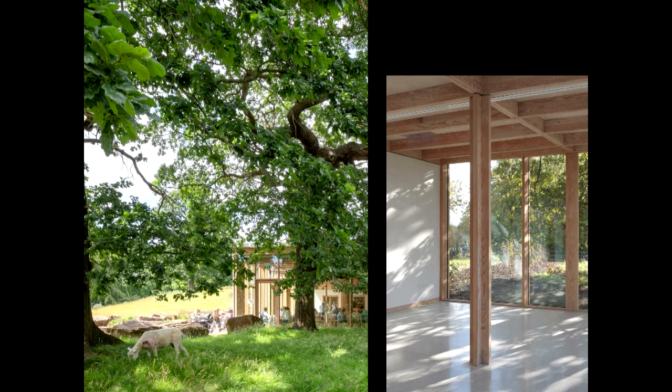We really enjoy the fact the building has these very different qualities from the south of the building, which nestles into some existing oak trees and allows this dappled light into the space, to the north of the building, where the gallery is hemmed and embedded into the hillside and has this very calm and diffuse light and very stable environmental conditions. It was also unusual for a gallery space to have the ability to have windows looking out to the landscape, but Clare Lilley, the director of programme, was very keen on the gallery not being a white box space, but having a real personality and being of its place and of the landscape. So largely the space is north lit to create diffuse light, but there's the ability to bring in direct light as well, which gives an added opportunity for artists using the space.

And then the southwest-facing restaurant space has a lot more drama and animation because of its orientation and this gentle sculpting of the south-facing proscenium, which in a way cradles the edge of the park. The building gently picks up on views towards the lake, and we sculpted the landscape just to ease the view towards the lake here and to Bretton Hall.

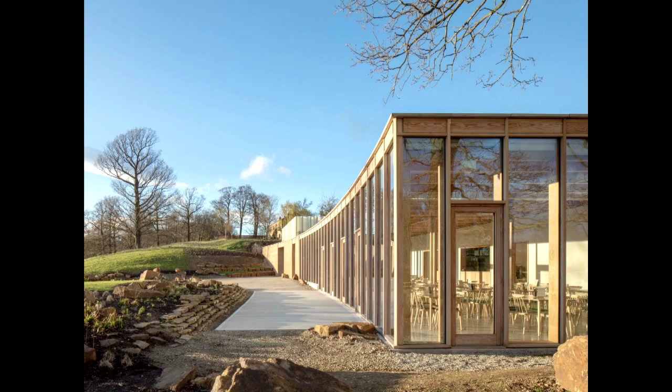And just to conclude, I think the building, although it's a relatively modest scale, has had a huge impact on the park in opening up several hundred acres of parkland which weren't easily accessible to the public. It's allowed the YSP to really open up its education programme. Fergus and I have been really warmed by conversations with the public, and particularly with users of the building and the staff, who argue over whether they can work a shift in this building versus a shift in the old visitor centre. So it's been a really heartwarming occasion to complete the building and for it to be shortlisted for the Stirling Prize. So thank you.